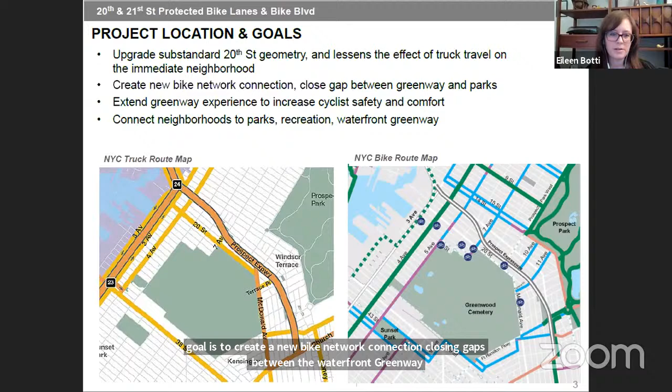Next, I'll share some background on the project motivation, the planning context, and the focus areas. So as you just mentioned earlier, this project initiated from community requests years ago with 20th Street. And since those initial requests, we have now an updated analysis and an updated street design toolkit to address the corridor with. There's also now the changing nature of deliveries and e-commerce. And we're seeing more and more people walking, jogging, biking along this corridor for recreation, especially along the cemetery edge where they use the road.

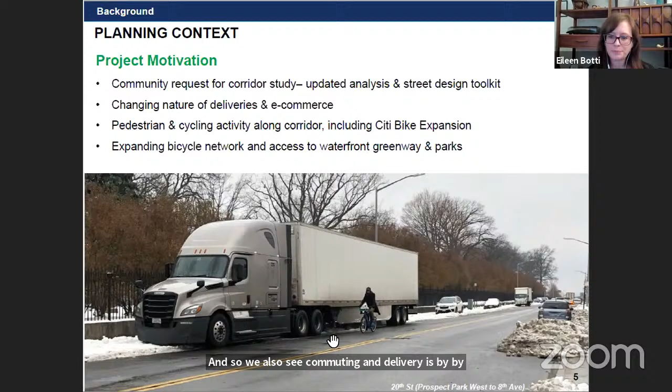And so we also see commuting and deliveries by bike increasing as well throughout the areas. So to speak to how this fits in with the greater comprehensive planning context, there are a number of plans and initiatives that are tied in with this project. First, the recently released Smart Truck Management Plan called Delivering New York will seek to update the New York City truck route network and implement new street design standards. Next, the Green Wave Plan for cycling in New York City was released recently in 2019, and that calls for building 30 miles of protected bike lanes annually, and also introducing new street design treatments, including bike boulevards.

The Open Street Initiative, which started in 2020, was made permanent, and then the mayor's office announced plans for DOT to convert an open street to a bike boulevard in each borough this year. Also, the Brooklyn Waterfront Greenway, as you know, is in development. And some exciting news is that construction's already starting down on the 3rd Avenue and Hamilton Avenue segments, which would link to this project. And finally, the Citi Bike expansion has recently come to the area. So we are seeing more people biking throughout the neighborhood.

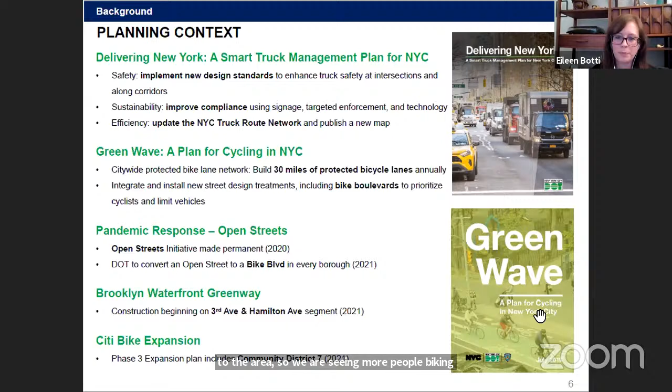And this project does have a number of focus areas that complement each other, and we'll speak more to the details of each throughout the proposal section. But first, just to introduce that with the existing truck route, we're looking to address the issues of very narrow two-way truck route through the one-way conversion to create more space.

Next, the proposal seeks to incorporate the new bike network connections, linking the new waterfront greenway down at 3rd Avenue up to Prospect Park to the east and also to the existing bike network. And third, we do want to minimize traffic and cut through traffic on neighborhood streets after trucks would be rerouted. And particularly along 21st Street, there's an opportunity with the bike boulevard to increase pedestrian safety and enhancements at the intersections for that as well.

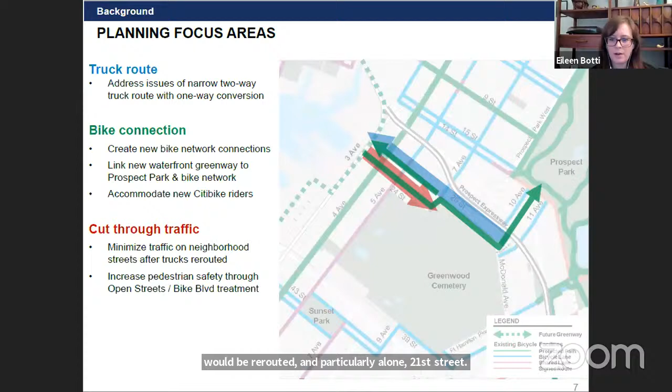Next, I'll pass it to Eugenia.

First, I want to apologize for the ice cream truck that you might hear in the background.

So I'll jump right in and I'll talk through how the street and traffic network functions today. So 20th Street is a two-way local truck route for the entire stretch. The land use changes from a mix of light industrial to residential use, so it varies quite a bit in terms of how the street functions. For the stretch of 3rd to 7th Avenue, as we've heard, and I'm sure you know as well, the stretch is particularly narrow, especially for two trucks, or even just two larger vehicles would have difficulty passing one another, as shown in the image here.

So parked cars tend to mount onto the curb to avoid being sideswiped and therefore further limiting the available space on the sidewalk for pedestrians to use. And despite having cyclists riding along 20th Street, there's no dedicated space for cyclists along the entire corridor, just due to the limited space available right now.

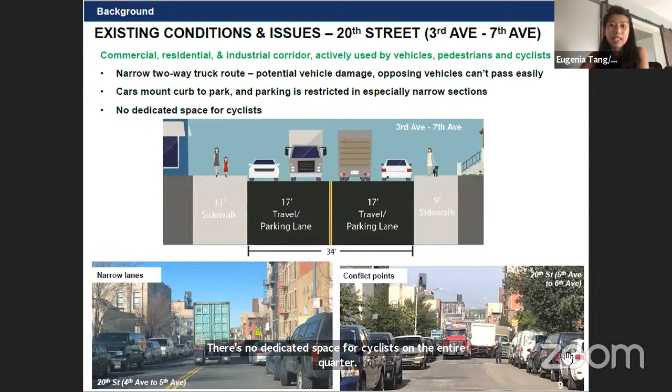Next, going from 7th Avenue to 10th Avenue, 20th Street runs along the entire stretch of Greenwood Cemetery with a narrow 5 feet sidewalk at most, which is substandard as is and not suitable for any person with disabilities to use. Sometimes it's narrower than this, and when there's streetlights or hydrants that can really tighten up the space even further.

As you may be aware, joggers and cyclists looking to use this area around the cemetery go into the streets where sidewalk space is limited, creating an unsafe condition, as you can see in this image, where children are biking on the streets as well.

Especially since the pandemic, we've already seen an increase of people looking for ways to exercise and engage in outdoor spaces for recreational use as well.

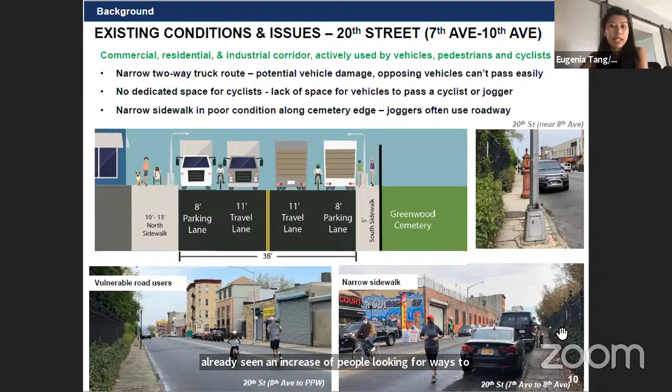Looking at the role of the entire 20th Street and the travel patterns, this corridor provides connection from McDonald Avenue to the Southwest Brooklyn waterfront and surrounding local areas, and it also runs parallel to the entire length of the Prospect Expressway.

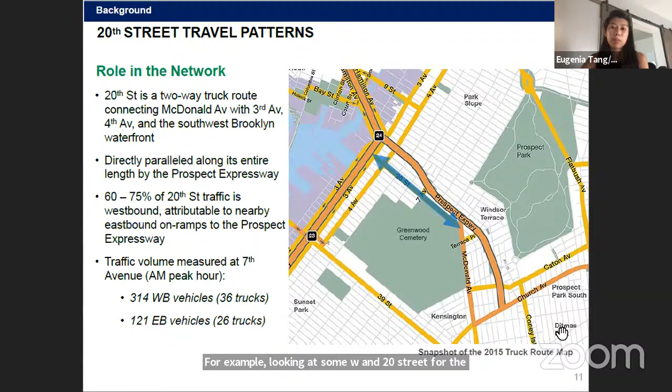Of the vehicles traveling along 20th Street, 60 to 75% of the traffic travels westbound, which can be due to the close proximity to the on-ramps to the Prospect Expressway for eastbound traffic to choose instead. For example, at 7th Avenue and 20th Street during the morning peak rush hour, there are significantly more vehicles traveling westbound compared to eastbound.

Local traffic from 3rd Avenue to 7th Avenue feeds eastbound traffic onto 20th Street if heading to McDonald Avenue. These trips generally originate from nearby neighborhoods, mostly from Red Hook, Gowanus, and Park Slope. Though trucks have fewer options, other eastbound vehicles are able to access the Prospect Expressway or Prospect Park Southwest for connecting avenues.

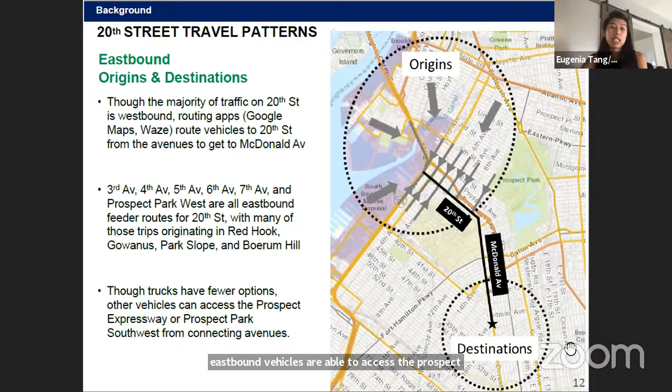For the bike network, there are connections to Prospect Park and protected bike paths such as 4th Avenue, along 9th Street, and Prospect Park West. But there's still a lack of east-west bike connection in this area, as shown on this map. Recently, with the Citi Bike expansion, stations were added around the cemetery, shown here with icons on and around 20th and 21st Avenue, 21st Street.

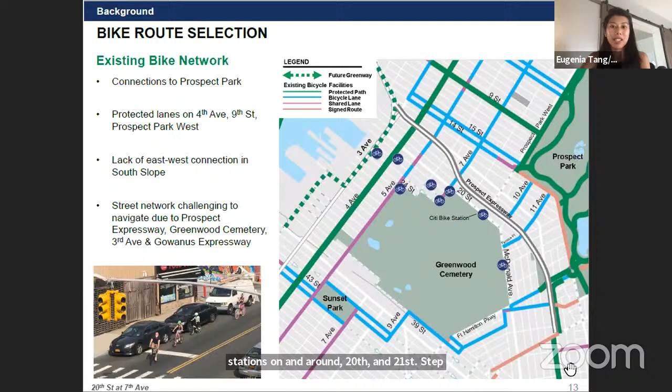This all leads to a design proposal specifically for 20th Street. The design will include a one-way westbound conversion from 3rd Avenue to 10th Avenue, along with a protected bike path, a shared use path, and improved overall network connections.

Here are some cross sections showing the existing and proposed design. From 3rd to 7th Avenue, we're looking at creating a standard westbound travel and parking lane width to address the current narrow and tight geometric constraints.

Currently, the parking regulation from 3rd to 4th Avenue has alternating days of no standing and truck loading zones, because the street is too narrow to allow two passing vehicles while keeping parking on both sides without being sideswept. With this design, we're able to address the issue and add back parking on both sides of the street by bringing the travel lane and parking lane widths up to standard.

This design also allows for a parking-protected westbound bike path for the safety of cyclists using the streets. For example, we see this design at West 29th Street in Manhattan, where it accommodates higher traffic volumes and deliveries while keeping cyclists separate from moving and parked cars with their own dedicated bike lane.

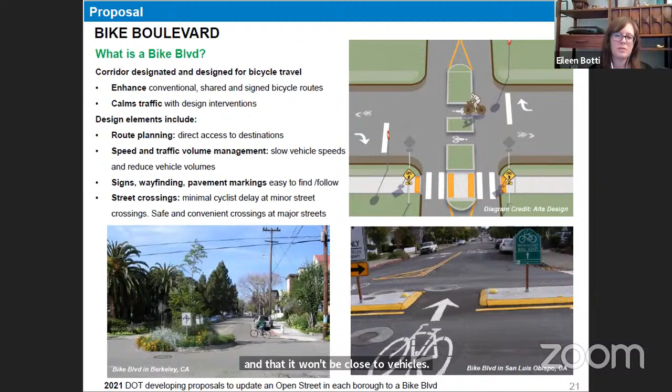So first, let's start with the mid-block treatment markings, since it's a bit more straightforward. 21st Street from 3rd to 7th Avenue is eastbound. It is a direct pair to the westbound 20th Street bike lane for that same section, 3rd to 7th, where that 20th Street bike lane would be one-way westbound.

The context here is a little different from 20th Street, where it's critical to separate the cyclists from the trucks on that downhill truck route. On 21st Street, the contrast is that there's much lighter traffic volumes, mostly passenger vehicles.

And so the design here along the block would look very similar to the existing condition. The parking lanes would stay on both sides. The travel lane remains, with the addition of new custom markings and signs that would encourage vehicles to travel slower. These greenback sharrows that you see are a new marking that can be used to add visibility for prioritizing bike travel.

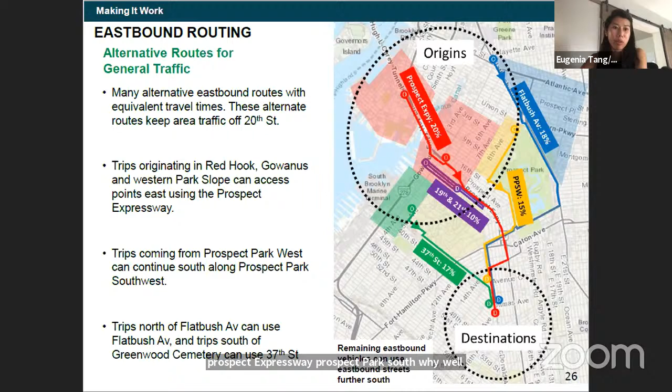For general traffic, there are many eastbound alternative routes that can be taken, such as 37th Street, Prospect Expressway, Prospect Park Southwest, and Flatbush Avenue, to name a few.

Trucks, on the other hand, although they have fewer options because they have to follow the designated truck route network, still have good alternatives that serve the same eastbound traffic needs of 20th Street, such as 39th Street and Flatbush Avenue. But the majority of trucks, especially those coming from Red Hook, are most likely to take the Prospect Expressway, as it helps avoid local traffic and connects directly from the I-278. We're also looking to install truck wayfinding signage in strategic areas to help direct trucks for the best routes for eastbound movements, and generally to keep trucks from going off the truck route network.

This will also address some of the concerns expressed in the Q&A about cyclists riding along sidewalks, by providing a dedicated lane for cyclists and pedestrians to use.

It will also reduce the need for cyclists to use the sidewalk instead, since sometimes they're on the sidewalks because they feel that it's not safe riding along traffic as well.

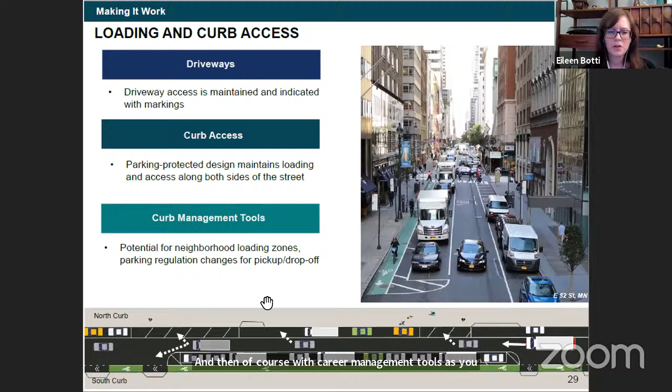For driveways with larger vehicle access, we design around those as well. This design gives more flexibility and space to work with compared to that narrow two-way condition, where there's really no room for error, not much room to pull over. And then of course, with curb management tools, as Eugenia mentioned, if there's interest in some of those neighborhood loading zones or other regulation changes, we're happy to look into those as well.

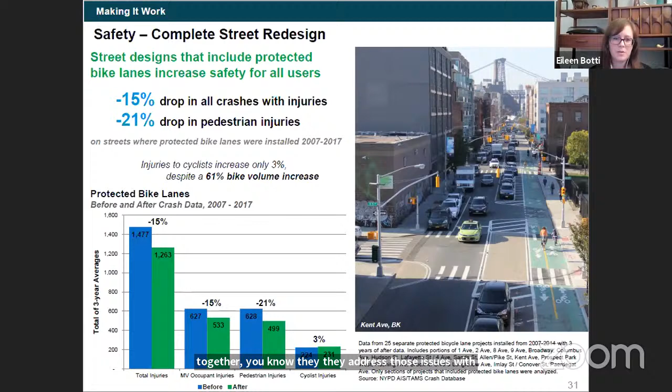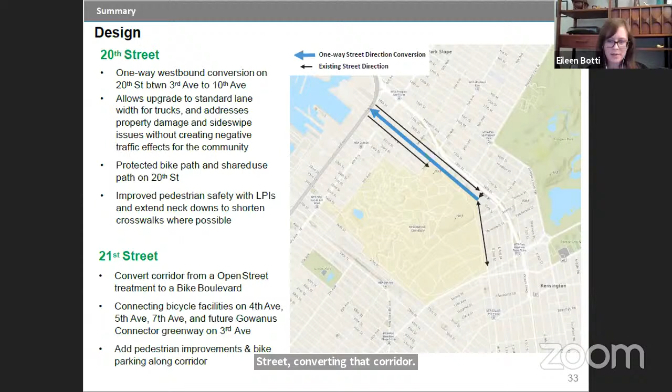Just to summarize all together: 20th Street would be a one-way westbound conversion proposal allowing for these conflict-reducing designs, such as upgrading to standard traveling widths for trucks, addressing those property damage and sideswipe issues with that narrow two-way truck route, and the additional roadway space can be reallocated to a parking protected bike path, which also calms traffic by design. That shared use path proposal along the cemetery edge would help address the lack of sidewalk, while accommodating the growing number of people walking, jogging, and biking in that area, and also for commuting, delivery, and recreation. On 21st Street, converting that corridor from Open Street to Bike Boulevard complements that proposal on 20th Street by discouraging cut-through traffic in the area and providing an eastbound bike connection.

So thank you for your time, and we're happy to take questions.

Thank you guys very much, that you were not kidding. That was a lot of information.

It's interesting. There's some interesting ideas. There's a couple questions that I have, so I'll ask a few.

My main concern is the eastbound traffic. It seems like it's going to get shoved onto 19th Street. I understand doing the work on 21st Street and having the bike boulevard will eliminate truck traffic from using that as a cut through, but 19th Street will feel the undue burden. Sending trucks to 39th Street, these are two other overburdened eastbound corridors, I don't know how realistic that is, unless there was to be some serious work done to make sure the wayfinding signs and the truck access to the Prospect Expressway was a legitimate thing.

But let's open up questions from board members first. Jeremy, does anybody have their hands up? Board members, if you can see that, you can call on them. I have 4 hands up so far. Members of the public, the first round goes to the board members, but you could also raise your hands and be called in the second round. So I have Cindy Vanden Bosch first.

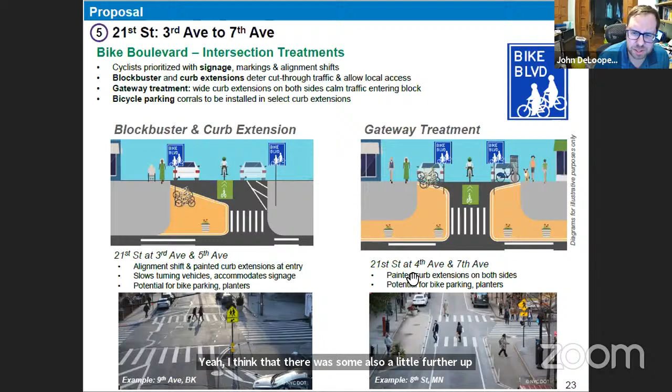Yeah, I think there was also a little further up by past Greenwood Cemetery too, right? Is it the 103 or... I feel like my memory could be wrong, but I think there's a couple routes up in that area too, and with these lanes and stuff I was just curious if that would impact it.

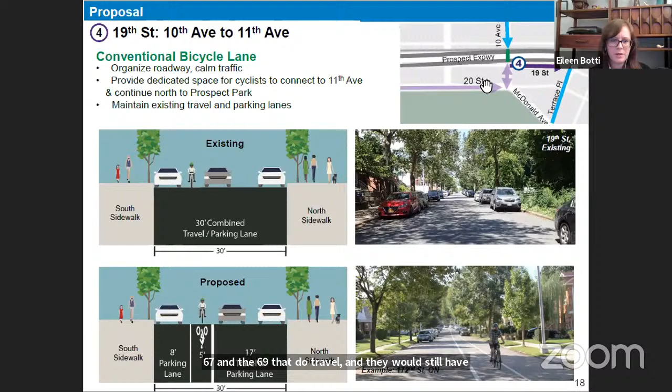So 20th Street along the cemetery edge, yes, there's the 67 and the 69 that do travel there, and they would still have access. Their bus stops are on the north side of the street, so away from the bike path. There's that corner where the southbound bus stop would get relocated and built out in concrete, also for the B67 and 69. If there are any other buses traveling through the area along 20th or 10th, they're still able to travel along those spaces. We do have to check the turns, not only for trucks but also buses, so that would still work. But the diverter doesn't really overlap with the bus routes.

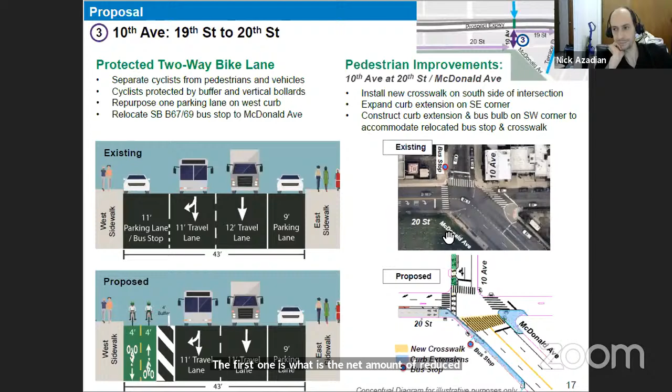The net amount is about 130, but majority of that is coming from the northern curb of Greenwood Cemetery, where that will be repurposed for the two-way shared use path, and with some additional repurposing of like at the corners and at like the key intersections, so that we can install some painted curb extensions and pedestrian refuge islands.

I got you. So basically it's a net loss of 130 spaces along the corridor, primarily around Greenwood Cemetery. Right, if this is fully parked with an average car length vehicle.

Gotcha. The second question I have is really in relation to the truck study, which we're probably not going to get. What data was used when compiling this information in terms of traffic? And was any thought made for what inevitably will be the installation of quite a few of the last mile distribution warehouses in Red Hook and Sunset Park?

So the study in itself, the project has, we know that there have been requests from the community over the years, and we have been in communication with the community. We have updated data collection and analyses. Luckily for the agency, we have been able to look at more of the origin and destinations for commercial vehicles and actually have included that in our analysis.

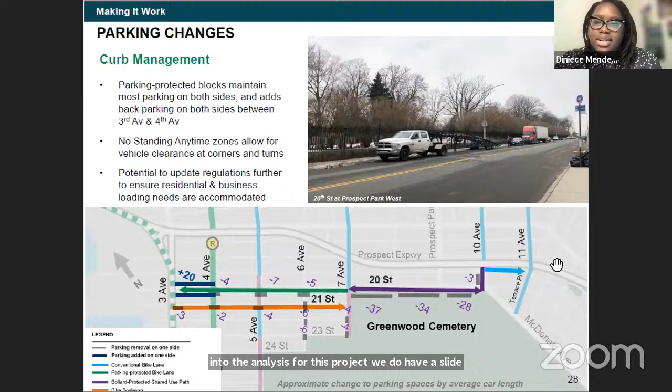We've also collected truck volumes and counts as well along the corridor that have actually been included in our traffic analysis. We need to make sure that this works before we can actually come to you confidently and speak about this proposal. So these are all elements that actually have been pulled into the analysis for this project. We do have a slide at the end, I believe, in our appendix that speaks to the traffic volumes, and we can certainly talk through some of that as well.

Eugenia, do you want to highlight some of that? Is this the slide? Yes. So this is just a slide showing the vehicle volumes, broken down by all vehicles, but also trucks going westbound on 20th Street.

So as you can kind of see here, there's a lot of numbers, I know, but majority of the traffic is going westbound. Most of the vehicles that are more likely to travel the entire corridor are going westbound, with the eastbound traffic tending to do shorter trips along the corridor. And with the close proximity of 20th Street to the Prospect Expressway, vehicles are able to take the on-ramps on 17th Street and 4th Avenue, or 19th Street and 7th Avenue, as an alternative as well.

The basis of my question was more so the data, but then also what future expansion was essentially built into these plans. Because if you're looking at past data, that's not necessarily reflective of what we're going to be dealing with when all of those facilities come online. And I know it's very difficult to project on a system as vast as New York City's transit system, but there has to be some kind of implication to see what is going to happen.

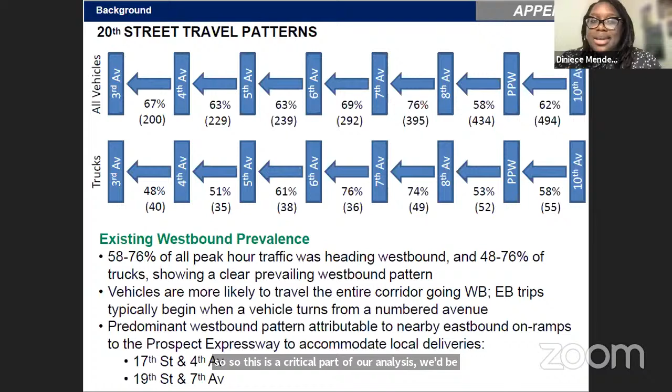Your point is well taken. We do a very thorough traffic analysis, especially for major transportation projects, where we look at the AM and PM peak periods and the activity for all of those corridors. We also look at pedestrian and bicycle movements, and ensure that the level of service is palatable, making sure we're not creating adverse impacts. This is a critical part of our analysis. We'd be happy to share what that process looks like in general after this call.

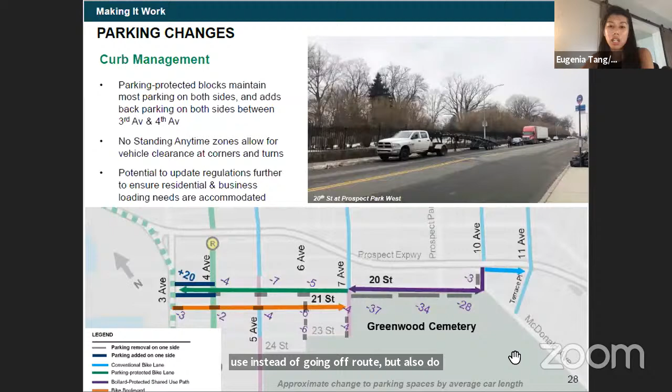Yeah, so 19th Street is narrower than a typical truck route, and also with the presence of the speed humps in front of the schools and along the corridor, it can help deter the unwanted truck traffic as well. We're also looking into putting together a wayfinding signage plan so that trucks can be directed to nearby truck routes they can use instead of going off route. DOT also has an ongoing and deep safety toolkit that we can use to help improve any safety concerns that arise.

I think some things like that should be included. There should be speed humps. We should look at turnaround ideas along 19th Street because there's no way to prevent that unless there are means taken.

But let's turn over the questions to the attendees. Hi, Zach, just before you continue.

I just wanted to highlight, adding on to Eugenia's points as well, this is really the start of the conversation, continuing to look at how we can improve safety within this area and in the district. We are also in coordination and discussion with NYPD at the precinct level to look at areas where we can do more stepped up enforcement, and that's definitely on the table. I know that in the past the community has expressed frustration with the lack of enforcement, but we've had more recent conversations to give us a little bit more insight on that. So we are working directly with NYPD to see increased enforcement once this moves forward with the project.

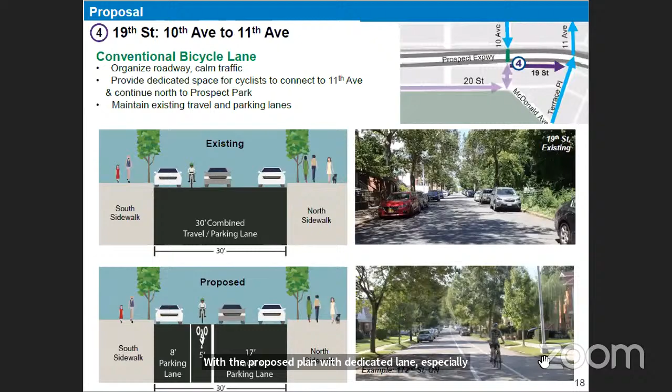The second concern is actually just a sort of good thing of having two-way truck traffic on a narrow street, is that these vehicles actually can't travel, I'd say, faster than 10 or 15 miles an hour. With the proposed plan, with the dedicated lane, especially going downhill in one direction, is encouraging these vehicles, I think, to not only go at speed, but above speed. I'd love to hear if this has been considered as part of the plan, the excessive speed of large vehicles. Thank you.

So I can first speak to the protected bike lane design here. We have used this on a number of other streets that experience truck travel, also on some truck routes. We do find that just by the nature of this design that you can see at the bottom, it does slow the vehicles, they have to travel the speed limit. With two-way current conditions, yes, vehicles are going slower if they're passing each other, but sometimes it's so bad they can't pass each other, and then there are backups and safety concerns. But just to speak to that one-way route, here you can see it's a standard lane width. It's more room for the truck, but it's still constraining and calming those movements a bit to keep them traveling more carefully on the downhill.

And then regarding the truck route, maybe Freight can speak to that question on 20th being eliminated as a truck route option. Yeah, so regarding the removal of the truck route, we want to maintain the truck route network just so that businesses along the corridor are still able to access and do their deliveries and operations. But with this proposal, we're able to reduce the number of truck traffic that you'll be seeing along the whole corridor with this one-way conversion as well.

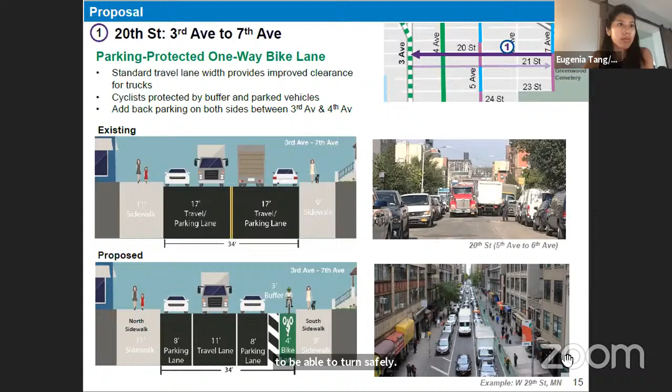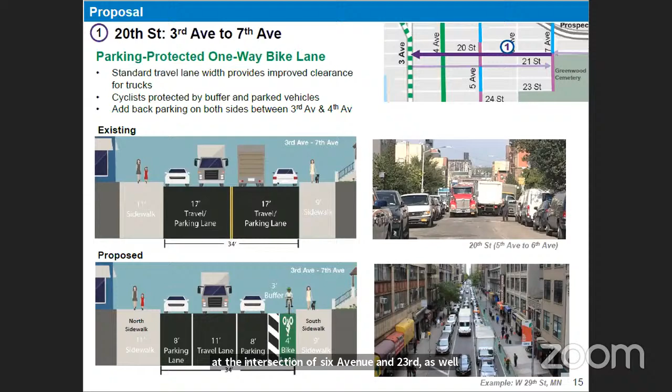Hi, thank you for taking my question, and thank you for all the information you're presenting. It's just a minor question out of curiosity. I saw that at the intersection of 6th Avenue and 23rd, as well as 22nd Street, you're going to put this mini roundabout, but at the intersection of 6th Avenue and 21st, it will be a diverter. Can you maybe explain why that is? Thank you very much.

All right, sure, I can speak to this slide. So basically, the concept behind the diverter is to further reduce the volumes along the bike boulevard. As I mentioned before, we can't pursue that on some of those other avenues that have bus routes traveling along the street. So here, that is the most robust treatment that we can include with the bike boulevard.

We are being a bit more permissive over here at 23rd and 22nd so that there is still more circulation available, so people could use the street grid as it's designed to turn around and access 21st for the last block. It's a bit more stringent here for this location since it's the bike boulevard. These other mini roundabouts are to help calm traffic on the rest of the corridor and add these crossings too.

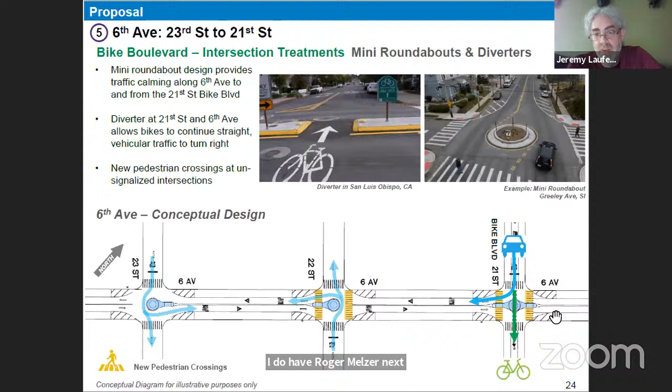Roger, you can unmute yourself. Roger? Yep, he's on. Okay. Yeah, I'm Roger Melzer, and I do have an apartment building in the Windsor Terrace neighborhood.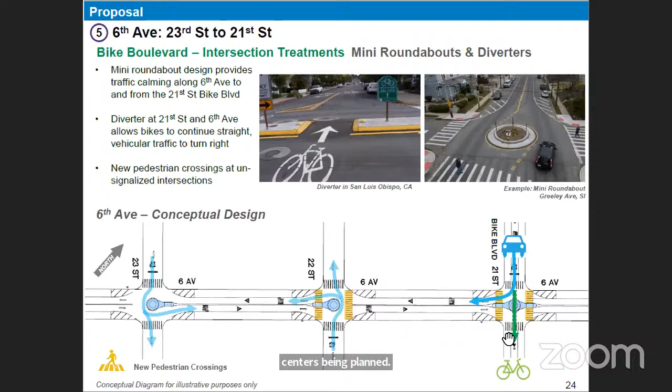One of my concerns is there are a lot of businesses along the 3rd Avenue corridor from 20th to 30th Street—a cement plant, FedEx. I see them using 20th Street going eastbound. And with the last mile distribution centers being planned, there's going to be even more demand for eastbound access in Brooklyn. I feel this proposal will have unanticipated effects on adjacent neighborhoods as all these trucks seek more direct routes than the theoretical routes you have planned.

I also know that the elementary and middle schools on 19th and 20th Streets create big traffic jams, both from school buses and parents double parking during the 9 months of the school year, which creates additional jam-ups for vehicles in the neighborhood. And nobody's even mentioned the school so far.

I think the easiest solution is just to eliminate parking on one side of 20th Street, from 3rd Avenue up to McDonald Avenue, try to improve the sidewalk on the cemetery side, and get your bike lane in there. But I feel that 20th Street has been a traditional critical truck route and vehicle route from along 3rd Avenue up into central Brooklyn.

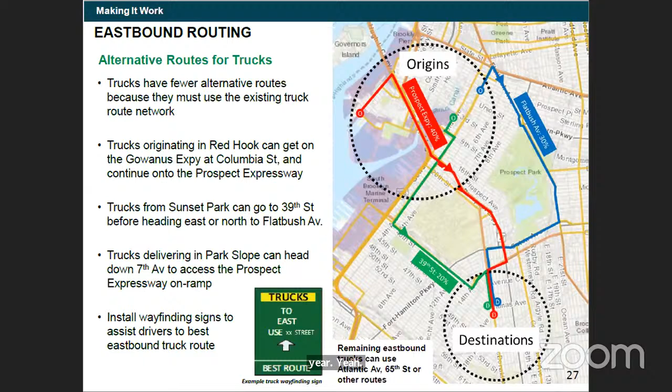Okay, John? Yes. Sorry, wanted to ask one and a half really quick follow-up questions. For the pedestrian—you mentioned a lot of improvements for pedestrians and cyclists and drivers on this, but I did want to ask an accessibility question.

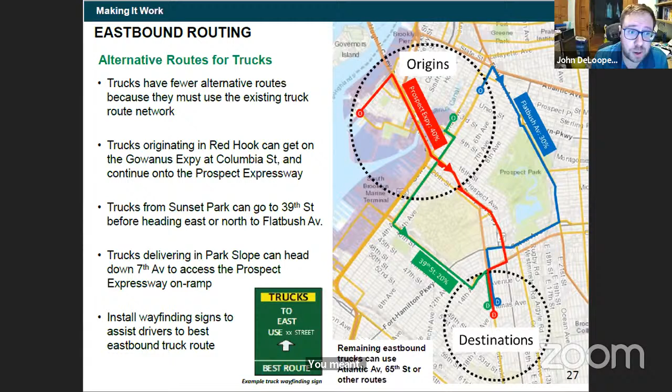You mentioned the 5-foot wide sidewalks are not adequate. With these upgrades, are there going to be other fixes to curb cuts and stuff? I know since the route starts down by 3rd Avenue and 20th Street, last time I looked at it, it didn't even have curb cuts, and the medians there were pretty not good—definitely inadequate for the pedestrians who cross there.

To answer the question on curb cuts and accessibility improvements: in the locations where we're doing concrete work, we would be upgrading the ramps in those intersections—so on 6th Avenue, and at that corner on 10th Avenue. We could look into what's going on with the lack of ramps at 3rd and 20th and see if there are plans to fix those soon. That might be the case, so we could take a closer look at that.

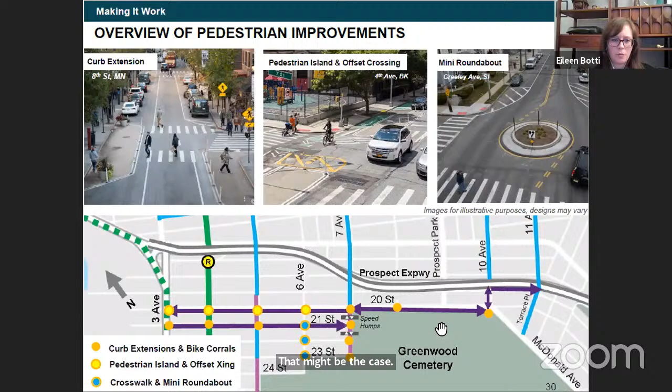For the path that's shared with cyclists and pedestrians, we are a bit constrained for space. If we were to include floating parking here, it's a little bit too narrow to designate it as a pedestrian path shared with bikes. It has to meet a certain minimum, and we wouldn't be able to meet that. So that's part of the challenge there.

This has been reviewed—swap the parking that's on the left side there with the travel lane? Oh, you mean to just switch these two? Yeah. We haven't included that in the design because it creates some challenges for turning on and off the street from that curb side—sometimes people coming out of the driveway, that parking might have to get cleared just so that turn could be made. So that's a bit of the challenge there.

Where we can, we try to keep the parking against the curb for the businesses there, since on this side there are not really any curb access needs for parking. So that's the reason we kept it on that side in this proposal. Okay, makes sense, sounds good. Thank you.

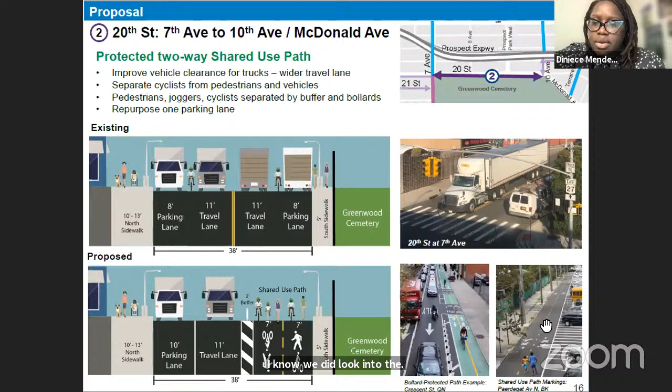Specifically on the subsurface conditions, Emily, are you on this? I know we did look into the street was resurfaced recently, and I know we looked at some additional measures here.

Yeah, so the street was resurfaced recently. Our roadway repair and maintenance did not find cobblestones underneath, as was the original concern, but the roadway has been added to a future capital reconstruction.

What and when is that future capital reconstruction? So it's on our radar, but there's no definitive information to give you at this time. We're also waiting for future capital reconstruction of Fifth Avenue since 1988. So without having a date here, I don't really consider that a promise. Even when we have a date, that's not really a promise.

Yeah, I just wanted to say two things. One, when it comes to the building project, for DOT, we would have to talk to the Department of Buildings, and maybe to you if there is damage done to actual buildings. We don't necessarily do vibration studies to see that damage. We'd have to work with them, and it'd be good to have structural engineers verify whether there's been damage to structures, which is something we're not aware of. If you know examples of that, you can let us know, and we can talk to DOB to have further conversations about that.

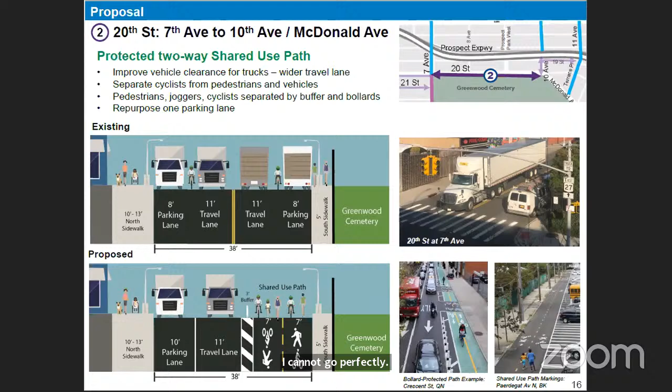We would love, because you mentioned 19th Street and the wayfinding signs, that information to understand how that's going to work and how that's going to be implemented, because oftentimes these things are talked about but they don't appear. Yes, thank you for that. I'm sorry, whoever I cut off, go first please. No, I was just saying you're free to send me an email and I will look into it as soon as I can to get you more information.

I'm speaking about what Keith had just said, that we were going to be given information about what steps were going to be taken for 19th Street, for example, and making sure the wayfinding signs existed. So I just wanted to know when you guys were going to follow up with us about that. There's nothing I needed to email you about. Yes, that's something I can follow up with you. We will definitely follow up, and on top of that, this presentation is going to be on our website sometime tomorrow, just so you know. And if you guys could share the PDF with us as always, that would be great. The presentation is also being live streamed on the Brooklyn Community Board 7 YouTube page and will be available in perpetuity.

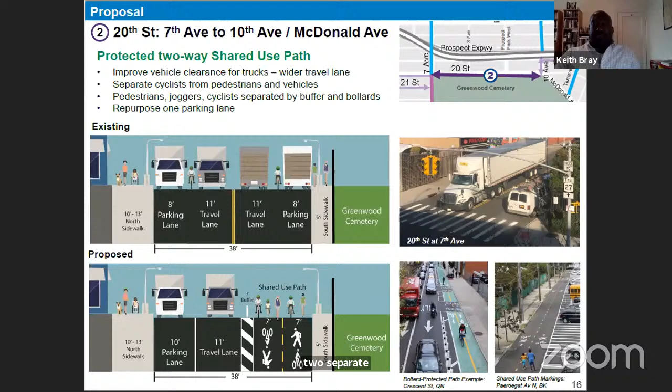Zach, I have a couple more hands up. Keith, I'd just like to clarify, this is a single project, right? This is one project here, 20th and 21st, it's not two separate projects? They're tied together, they're in sync. Okay, thank you. I have Nick Azadian next.

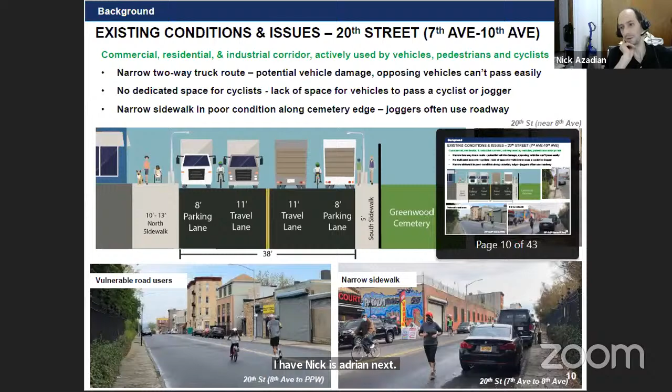Keith, this is more so directed to you and the rest of DOT. My question is how do we ensure that the items being discussed today and the various promises being made are followed through on? As we've talked about many times, there have been many promises over the years that routinely fall through, and we would like for that to stop happening.

I'm trying to be very polite about it. In other meetings I've been significantly more terse, but we would like to see positive movement on these issues. I would like to know how you will see these things through, rather than us attending these meetings, having these conversations, and then having to have the same conversation six months from now about the same item that was promised or discussed that still does not happen.

So yes, and thank you. I do remember our conversation a couple weeks ago. For this specific project, the feedback that we're going to have, we are going to make sure, I'm going to make sure, and my office is going to follow up with me, that the things we discussed and we know that you're already looking for, we're going to get to you before anything happens.

I can say internally, when we were planning this project, one of the biggest topics was the eastbound traffic and what was going to happen to it. That was talked about extensively internally, because we knew that was going to be one great fear of a lot of people, that you're changing the truck route and all those trucks are going to go eastbound. That's something Denise and Hena were telling earlier about, the traffic analysis we're doing. That's why it was done for this project.